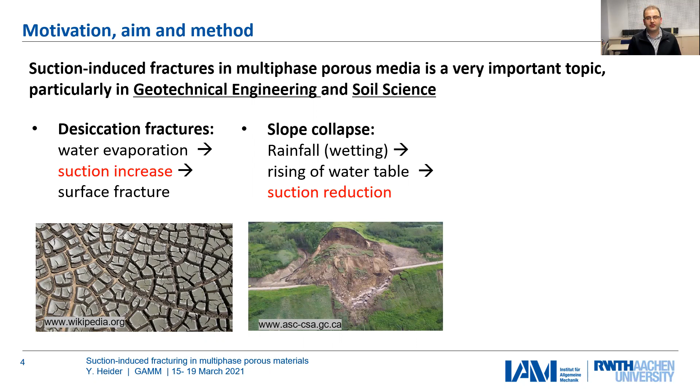Apart from suction effects in unsaturated soil, there is another kind of suction due to freezing, for instance soil freezing. This could be artificial, in artificial ground freezing, or natural, due to climate changes. Soil freezing leads to change of suction, so cryosuction, and this also leads to damage in the material. This is a topic which will also be addressed in this presentation.

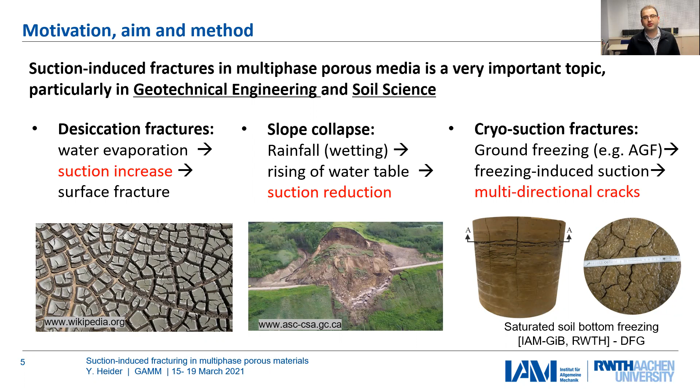Roughly speaking, the aim of this project is first to understand and predict the suction-induced fractures in porous materials through numerical modeling. We would also like to calibrate and validate our models through comparison with experimental data, on soil drying and freezing.

The methods we apply here include first microscopic analysis, just to understand the source of these suctions and damages. But we'd like to have numerical examples on the engineering scale, so it's also important to go for continuum mechanical modeling. In this connection, we apply the phase-field approach for fracture modeling, and also the phase-field approach for the phase change material in case of freezing.

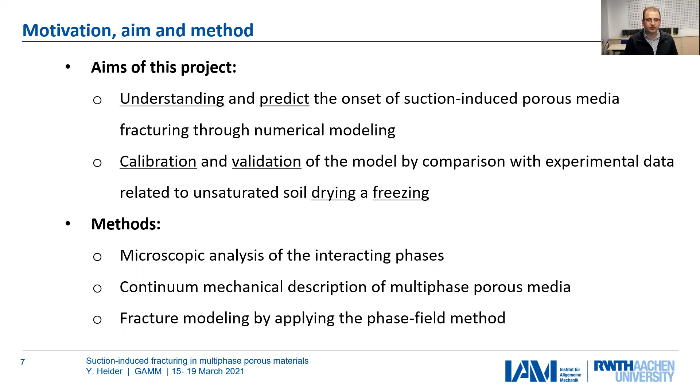After this short introduction, I'll talk shortly about the microscopic origin of suction and our way to the higher scale, which is a macroscopic approach.

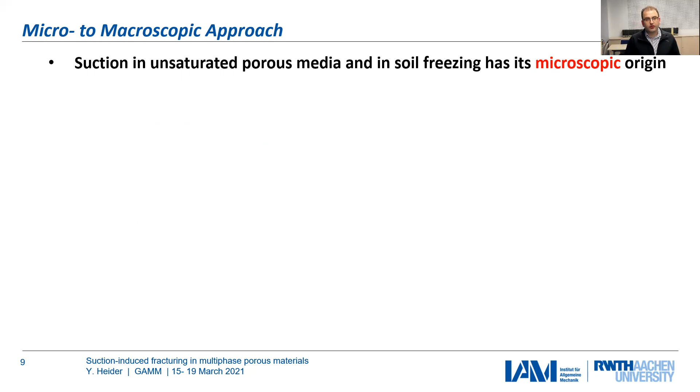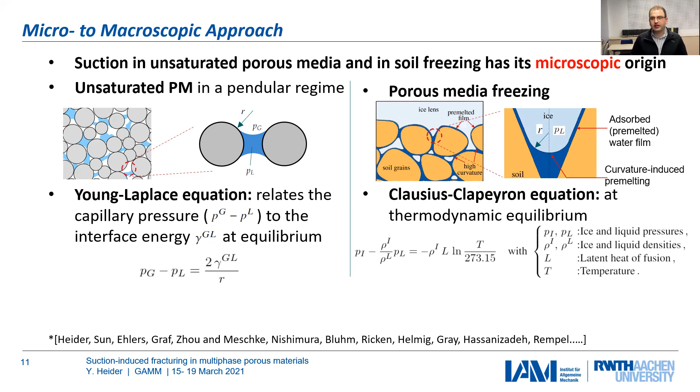Likewise, if we look at the freezing of soil, in this picture we see the ice phase and water phase. They exchange due to the change of temperature, and we have the soil phase. But we will always see some kind of water film, adsorbed premelted water, and also curvature-induced premelted water. This is a relatively complicated phenomenon, which can be described on the lower scale using the Clausius-Clapeyron equation. This is on the micro scale, but what about the macro scale?

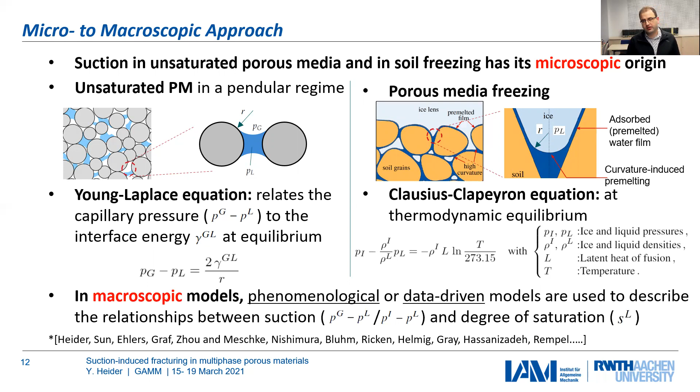It's difficult to use these relationships directly, so we usually replace them with phenomenological relationships and fine-tuning models, or we use data-driven models, with the aim always to describe, for instance, the relationship between the suction - the gas pressure minus liquid pressure, or the ice pressure minus liquid pressure - and the degree of liquid saturation or degree of water saturation.

For instance, if we look at unsaturated soil, we usually use some phenomenological model like the Van Genuchten model, which is simply a relationship between degree of saturation and the pressure head, with some additional parameters adjusted depending on the available curves. This is a single curve relationship. It roughly describes the drying and wetting processes, but in reality we have to distinguish between the two curves of drying and wetting, especially when dealing with clay soils with very low permeability.

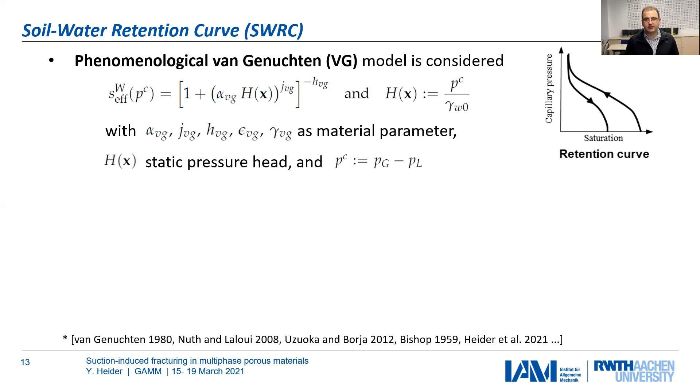An alternative to this approach would be data-driven retention curve models. The idea in this case is relatively simple: we first have to generate a database from the lower scale simulation.

So lower scale simulations are usually much closer to the physics, so they are more reliable. We can use discrete element methods to describe the deformation of our porous material, and we may also use Lattice-Boltzmann with multiphase fluids to describe the retention behavior.

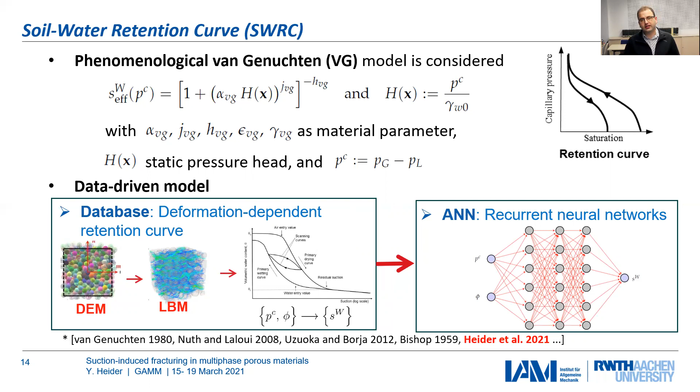After generating this database, we can go to machine learning. We apply, for instance, artificial neural networks with recurrent neural networks, because this is a history-dependent process. Then we can generate our retention curve machine learning model. The advantage is we can include a lot of information which is usually not included, for instance in van Genuchten, like the porosity, the structural tensor, and other macroscopic information.

Now let's focus on phase-field modeling of drying-induced fracture, or desiccation-induced fractures. Phase-field fracture is used widely in fracture mechanics, and the idea is relatively simple: we approximate the sharp crack or sharp interfaces of a brittle crack by a diffusive one. This is done by introducing a phenomenological phase-field variable D, which varies from 1 to 0 - 1 if we have a crack, and 0 if we have intact material.

Once we have this, we can define a kind of degradation. If we look at the total energy, it consists of elastic energy and fracture energy. The elastic energy itself can be split into a part which includes tension and shear, and a part which includes compression, so that we have a crack if we have tension or shear.

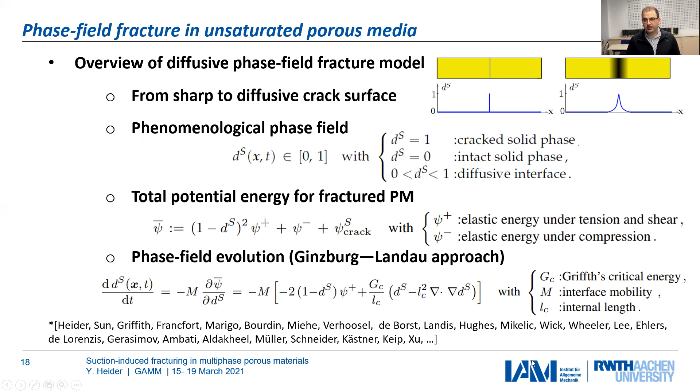Then we need another equation to describe the evolution of the phase field, and I follow in my work the Ginzburg-Landau approach, which is also widely used. In this equation, it's a time-dependent equation. We could also simplify this if we assume a quasi-static fracturing process - we get rid of this first term, which includes M, the mobility or interface mobility. In this equation we also have GC as a critical energy, and an internal length scale.

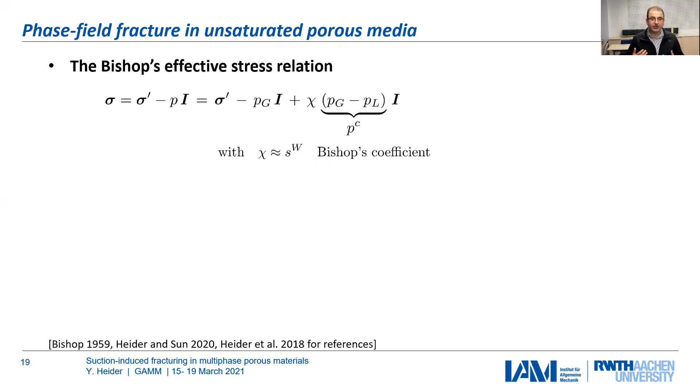Because we have unsaturated porous material, we have to describe the relationship between the total stress and the effective stress. For this we have Bishop's effective stress, which includes the gas pressure, the liquid pressure, so the suction in general. This factor chi can be replaced by the degree of water saturation.

So if we want to consider the crack, so the degradation of stiffness, we multiply by a function which we call GD - this is a degradation function, and it captures the degradation of stiffness. It's multiplied by the part which represents the shear stress, and the part which represents the tensile stress. We also have degradation in the suction, because if we have a crack, then these liquid bridges will also be broken, and then we will have less suction, logically.

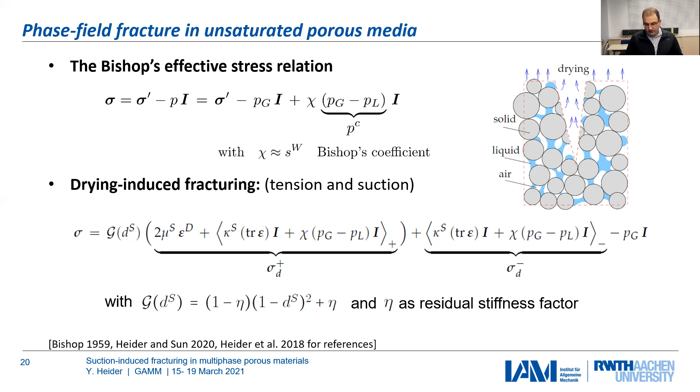So if we have a crack in unsaturated porous media, we also have to take care of other issues like the permeability. If it's initially assumed to be isotropic, then by the formation of cracks we will have a preferred flow direction, so we'll have anisotropic permeability, and this has to be considered.

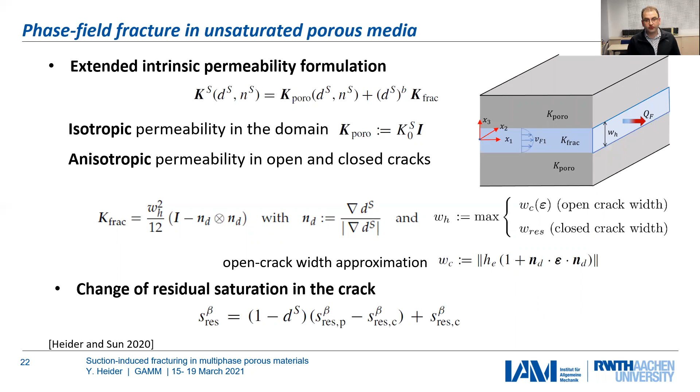So at the end of the day - I'll not go into details at this position - we have to deal with a number of partial differential equations. In this case of unsaturated porous media fracture, we have 4 partial differential equations, and these have to be solved. We solve this using the finite element method.

We use a mixed method, which includes monolithic solution of the porous media problem - the first 3 equations. Then in the second step, we solve the phase-field equation. So in this sense, it's staggered and monolithic at the same time.

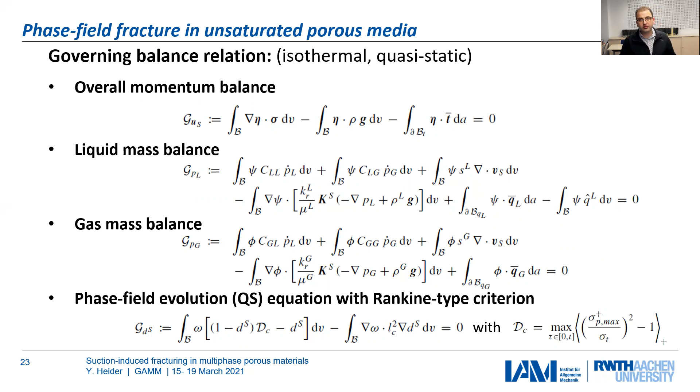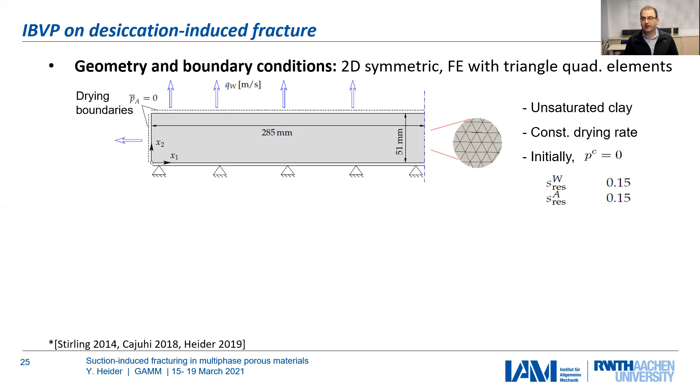We are not including the temperature here explicitly, and we have some residual degrees of saturation, as you see here. Initially we have no suction. By solving this, we see the evolution of the cracks agrees very well with the experiments, from the directions, and also the way these cracks evolve.

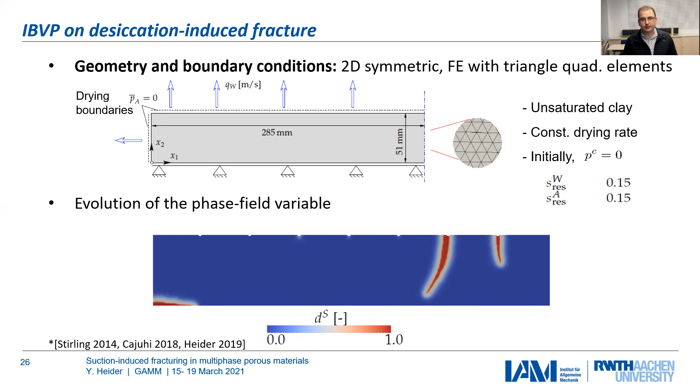I'm talking about qualitatively here, so we do not have the full data from the experiments. These are from the literature.

We tested a number of factors which affect the crack patterns, and also we studied the effect of air pressure on the onset of crack or enhancing of the crack. We see that the air pressure also plays some role. We see that there will be more cracks if we reduce the permeability. There are some numerical factors here, like the internal length scale of the phase field approach, and also the mesh refinement, which might play some role in these patterns.

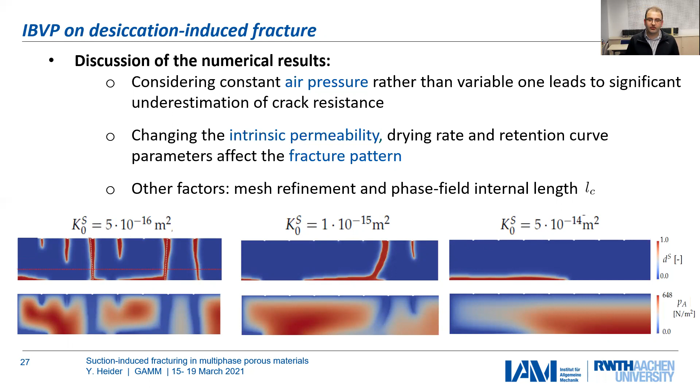We move to the second problem, which includes suction-induced fracturing, which is freezing. I talked a little bit about the cryosuction at the beginning of this presentation. So now I will talk about what we did in this context.

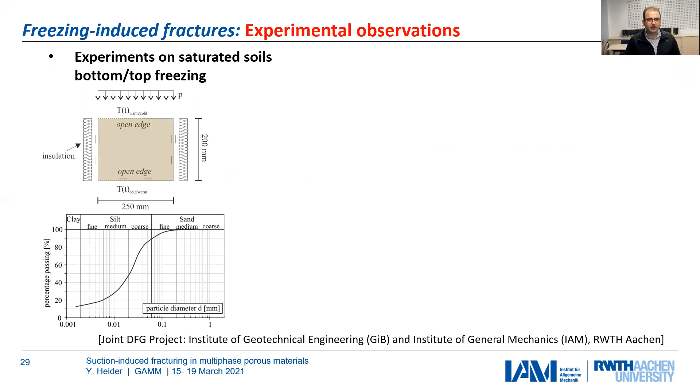So we have experimental data on saturated soil freezing. This is in the context of the DFG project between our institute and the Institute of Geotechnical Engineering at RWTH Aachen University. We tested a soil which has this granular distribution, including clay, silt, and sand. As you see here in the geometry, we have insulation on the sides, and we applied lower and top freezing, but in this representative result I'm showing the case of lower freezing.

So in this freezing, we distinguish between two phases. The first phase is the transient phase, where we have ice penetration in the domain. In this case, the cryosuction is not really important because the interface is moving constantly, and it's much faster than the effect of the suction. And then we have the quasi-stationary state, when the water-ice interface reaches a certain location and stops there.

In this case, it starts to suck more water, first from the neighboring subdomain, and then later from the boundaries. So we applied at the top boundary, for instance, some water source, so that the domain can also absorb water if needed. And we saw that the heave due to this process also increases in the quasi-stationary stage. Also, the interface of the water-ice is not really significantly changing.

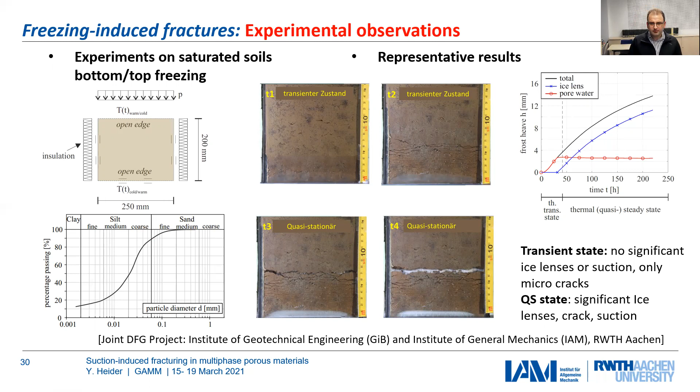So in this case, we will see some cracks and the formation of what is called the ice lens. We want to capture this effect in the numerical model. So first, we want to capture the formation of ice, the phase transition from liquid water to ice. We use here the phase field approach. This is the original phase field model, which is used for phase change materials.

Of course, it relies on the phase field variable phi. It changes from 1 if we have liquid phase and 0 if we have ice phase. And then we define this interpolation polynomial, which gives us a kind of mapping between water and ice phases. We can use this interpolation function also to capture the change of density, for instance, or the permeability across this interface. So this is an important issue here.

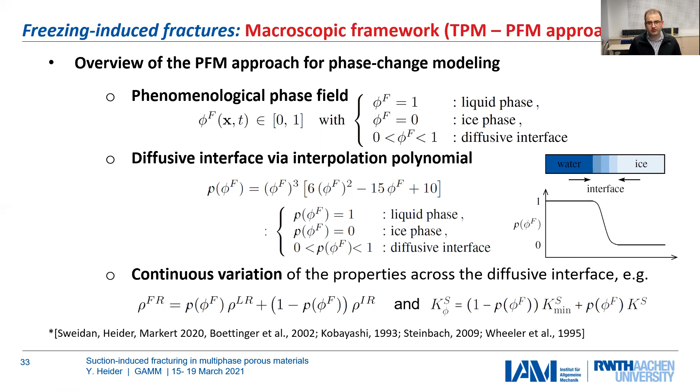And then we have to deal with the cryosuction on the macroscopic scale. So what we did here, we also relied on some literature in this context. So we proposed a phenomenological cryosuction model. It's very similar to the Van Genuchten type model related to unsaturated porous media. And as you see here, S cryo, this suction, equals the ice pressure minus the liquid pressure, and it includes Chi L.

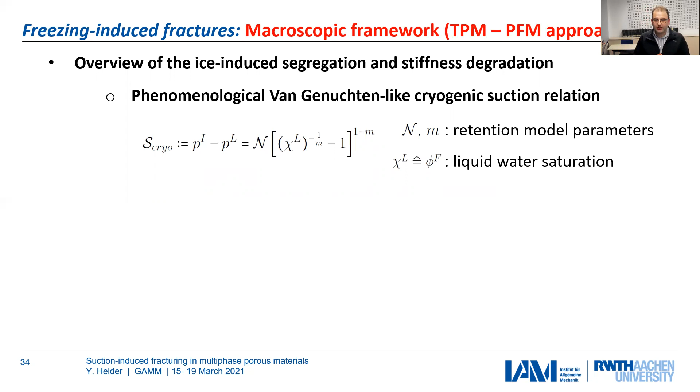And Chi L in our context is liquid water saturation, and this is nothing but the phase field variable, because our phase field variable will be 0 if we have ice and 1 if we have liquid. So we can simply replace this in this equation.

Now we also don't like to work with two variables, so we don't want to use explicitly specific variables for the pressure in the ice and one for the liquid. So we can get rid of the ice pressure by recalling the net pore pressure formulation, given in this equation. This originally includes the liquid pressure and the ice pressure, but when we include this suction, we can keep the liquid pressure as the primary variable, and we don't need to explicitly compute the ice pressure because the suction is computed after solving the phase field equation.

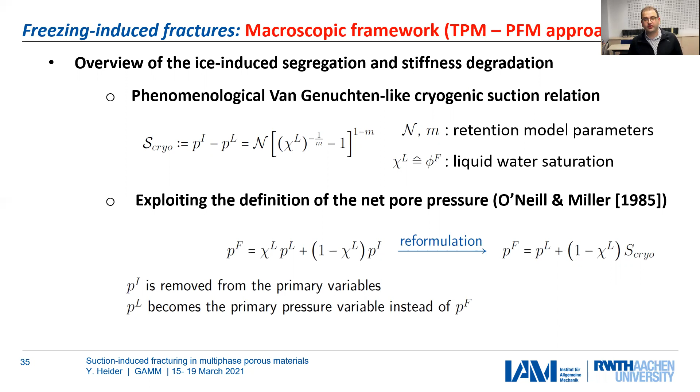Okay, so this is for the suction. Now we have seen that in the quasi-stationary state, we have some horizontal cracks, also a crack evolution. So we need to capture this damage effect. Of course, we can use the phase field fracture model, but we did not use it yet. It's for our future work. So we applied in this preliminary result some simple damage model, which relies on the phenomenological separation void ratio.

This void ratio is related to the pressure in the domain, and we defined a scalar degradation variable d, such that d equals 0 if the void ratio is smaller than the separation limit, meaning no cracks, or it becomes 1 if the void ratio is greater than the separation limit, meaning we have a crack. It will change in some diffusive way.

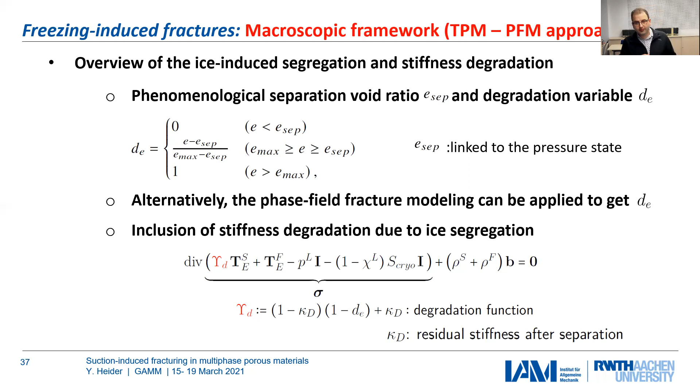By introducing this d, we can use the same idea as phase field fracture. So we define a degradation function, and we multiply this degradation function by the effective stress of the solid phase, so that our new overall momentum balance can be given in this formulation here.

This problem is a little bit more complicated than the previous one. We now have 6 partial differential equations. The first 3 are strongly coupled: the mass balance of the fluid, the momentum balance of the fluid, and the momentum balance of the overall aggregate. Then we have 2 energy balances because we have distinct temperatures of the fluid and the solid, and we have the phase field evolution equation.

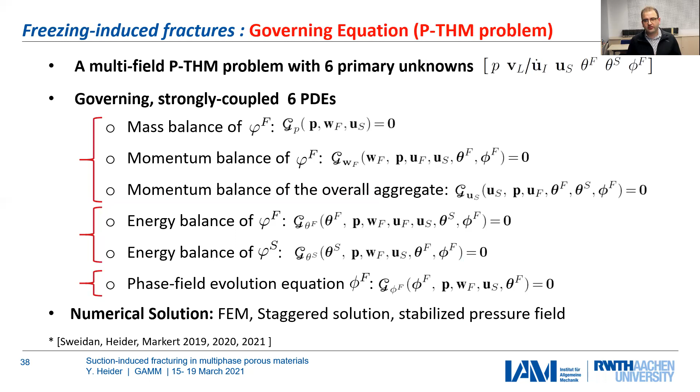We solve this also using finite element methods, using a staggered solution. We have to take care of some stabilization problems, especially in extreme cases, like when the fluid becomes almost incompressible. In some cases, due to freezing, we would have very low permeability, almost 0, which causes numerical stability problems. But all these problems have solutions, and I think we could figure this out.

Now, to compare our numerical results with the experimental data, first I will address the results for the transient state. We see in this picture the temperature distribution and the water-ice interface at different times, here after 25 hours. Comparing the temperature time history and the position of the interface time history with the experimental data, it shows very good agreement.

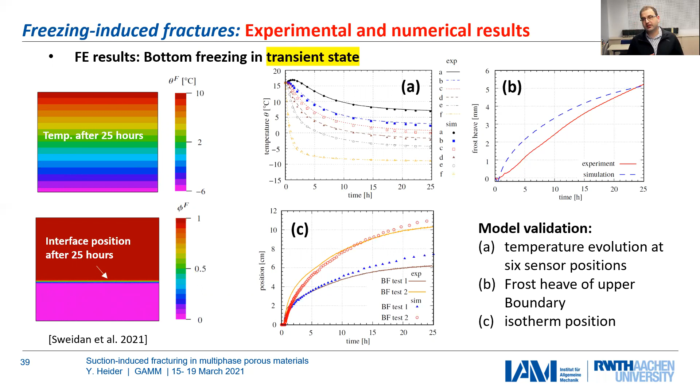Also for the frost heave, we see the same tendency, and we are capturing the heave with some deviation here. We assume this is because of the plastic nature of soil, since we do not include plasticity, and this will also be part of future work.

However, there are some issues like vertical cracks which could not be captured in this model, so that's why we will extend this in the future.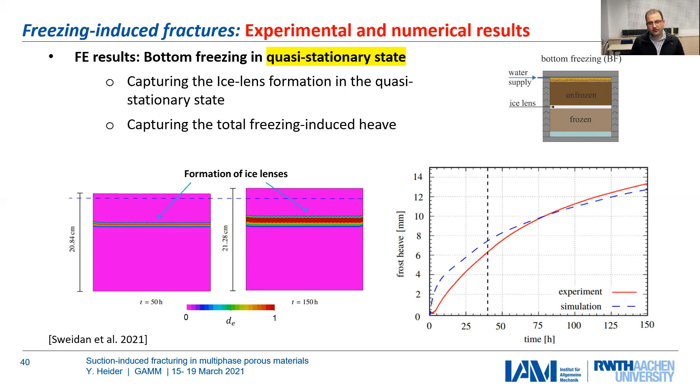So for future aspects, we want to extend this freezing model to include phase field fracturing, which uses an energetic criterion for the determination of the crack path, so that we could also capture the vertical cracks which were observed in the experiment.

We'd like to extend this study of soil freezing to unsaturated porous media. This is also important because there are always some remaining air bubbles in the domain, and we would like to replace our phenomenological models, like for the retention curve, with more accurate data-driven models using, for instance, machine learning approaches.